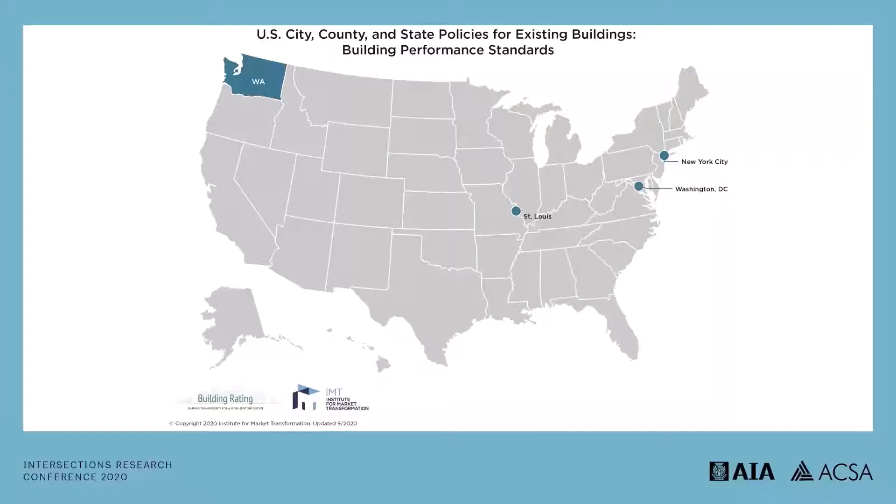We're actively working with a dozen additional cities and states building on this framework.

The standards could include considerations for multiple measures, including energy, like site energy use intensity, carbon, water use, health measures like indoor air quality. They can be designed to prioritize upgrades supporting climate resilience or to prioritize investments in building sectors where improvements will most benefit society. City governments are looking at these flexible standards as a way to advance social priorities as well, looking at ways to advance affordability. A few of my IMT colleagues recently published a paper on how to improve buildings under a building performance standard while maintaining affordability in housing.

Another trend in policy is toward involving the people most affected by a challenge in the policy design process. In the context of building performance standards, this includes people who experience unhealthy buildings or live in polluted neighborhoods, renters, and also members of the industry who can affect how buildings are designed and constructed.

So given these trends in policy, the key questions I want to pose to this community for research and practice address how we ensure that buildings perform to the level we need them to. What is or should be the architect's role in ensuring high levels of ongoing building performance? What are the most important measures of building performance? Many measures have been offered in leadership frameworks like LEED, WELL, Fitwel, and Passive House.

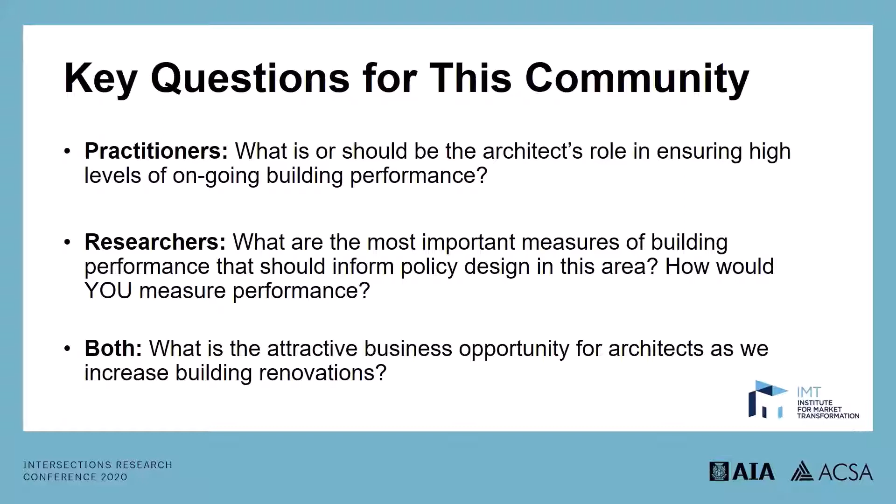What measures do you think matter most and should be applied to the policies under design today? And finally, what are the business opportunities for architects as we increase building renovations across the country? It's great to be here with you today, and I look forward to our conversation.

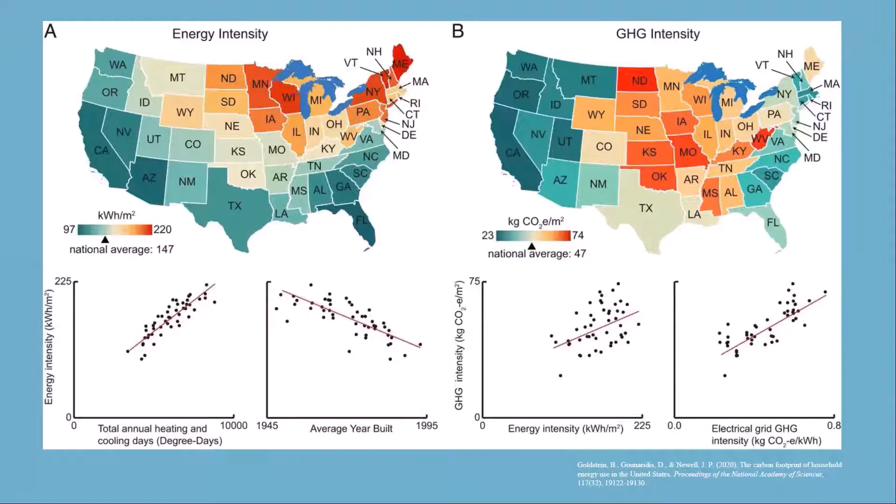...the legacy economies or legacy component of the built environment in settlement patterns in the Midwest and the Northeast, which would be anticipated by some measure to have parity with economic output. But then what we see in terms of GHG intensity is that it's actually not necessarily about economic output—these are slightly different measures between Scope 1 and 2, and Scope 3 emissions. Nonetheless, what we see here is a difference in lifestyle and settlement patterns that are largely attributable to land use, as I would argue at the end of the day.

Los Angeles actually has a lower carbon footprint than Boston, which I think would surprise many people who think about car use and suburbanization. But what we really see is that it's the suburban and housing land uses that actually change the mean. It's the wealthy suburban areas that further skew the underlying efficiencies of our carbon footprint. This is something we have to keep in mind.

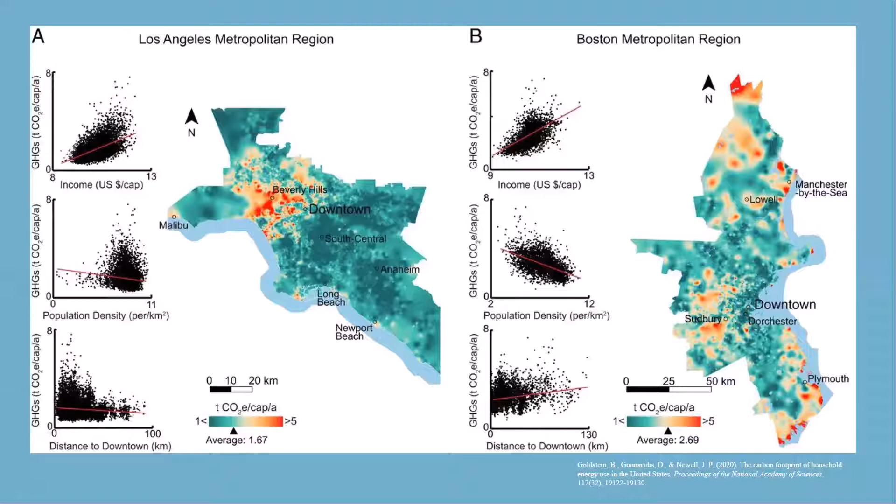So the proposition I'll make today is that land use is the most economically efficient way to address climate change. The upside is that it's truly scalable, and we have all these other co-benefits of ecosystem services. The downside is that there's a scarcity of land, or an outcome associated with our interventions in the name of climate mitigation that undermines affordability of housing in particular.

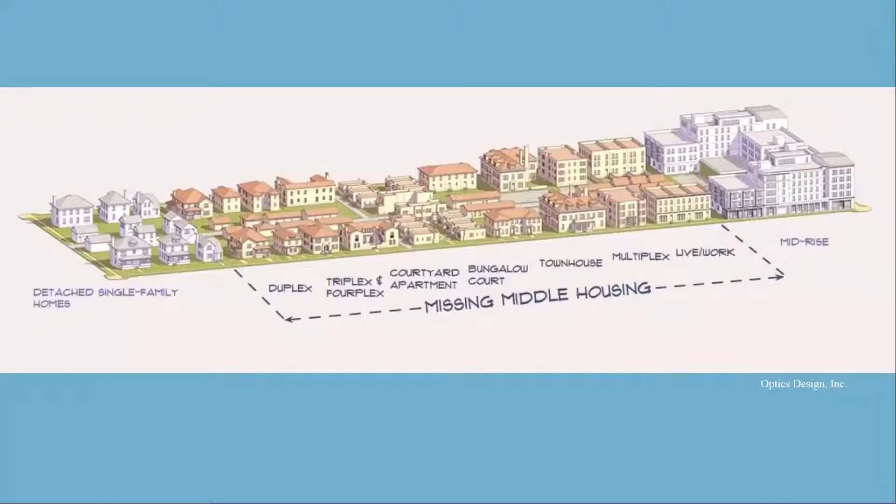We can think of infill development as an opportunity in architectural practice for a greater diversity of typology—in this case, the missing middle of housing, which I think is a critical component of environmental design. It has a variety of other co-benefits in terms of accessibility of transportation, healthcare, and other things that accommodate these greater densities.

And of course, TOD is the ultimate holy grail of urban land use. Here we see North American cities, as measured in gigajoules per capita per year, really standing out by virtue of our car economy, for lack of a better term.

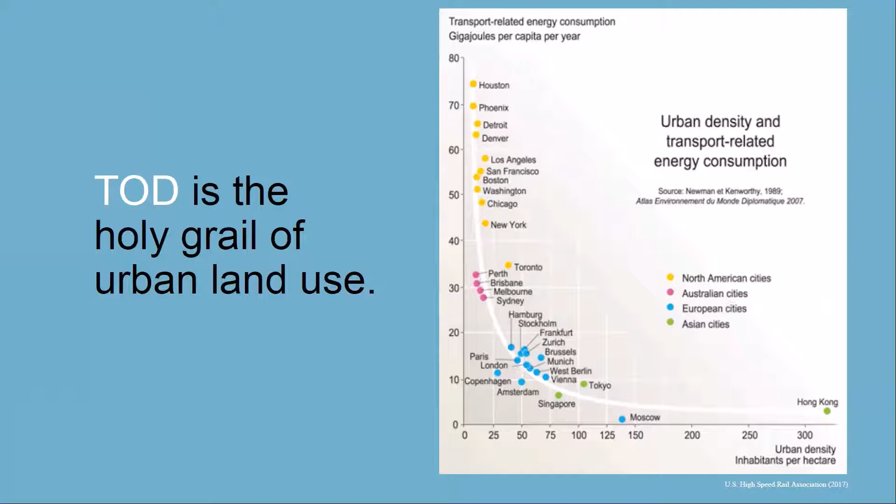So where does this all boil down to? It boils down to an opportunity for merging land use through zoning regulation with building regulation. There's a carrot there: we set up EUI, energy intensity benchmarking, and use that benchmarking perhaps for bulk bonuses that reward increasing marginal utilities in the energy or underlying carbon footprint associated with buildings—means to stimulate or incentivize investment in sustainability.

But I think at the end of the day, it's really about sticks. It's about disclosure and reporting of greenhouse gas or carbon equivalency in buildings, as we see for instance in Local Law 97. But fundamentally, at the end of the day, it's about a price on carbon—there's no two ways around it. That price on carbon has to be incorporated in life cycle analysis from an architectural design point of view, and it has to be incorporated within greater and broader measures of land use.

This is the only way we can fundamentally address climate change and climate mitigation in the built environment. It's a combination of a price on carbon, environmental technology, and fundamentally, land use. These are the three pillars from which we have an opportunity to address the climate crisis that we live within.

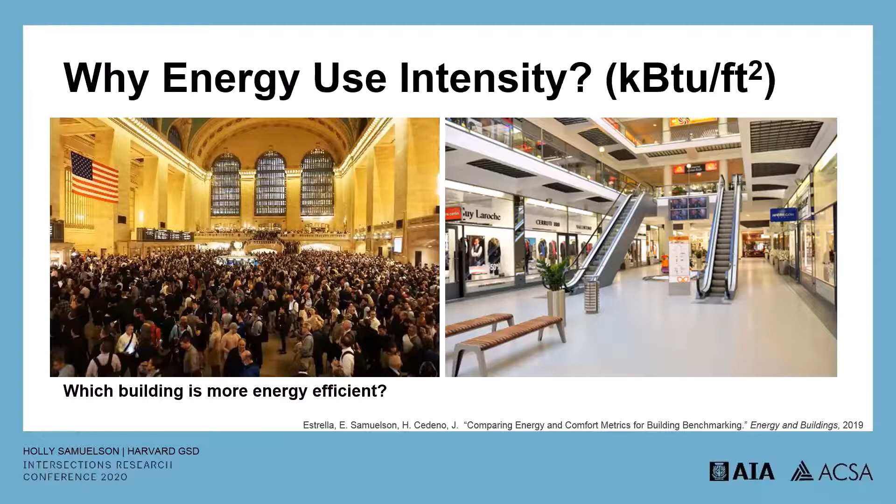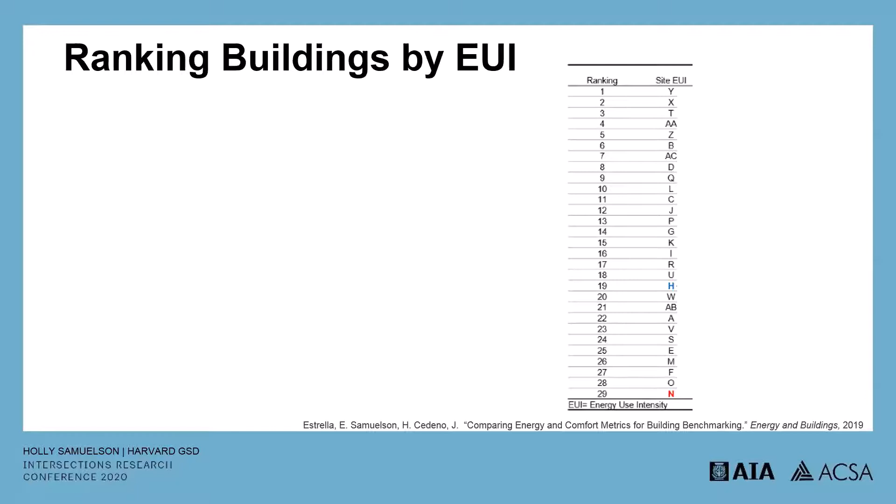So my team was wondering what would be a better metric to use. In this project, we were ranking buildings by energy use intensity, and these were residence halls. You can see the rankings on the right. Then we also ranked them by EUI per person and per person day, and the rankings totally changed.

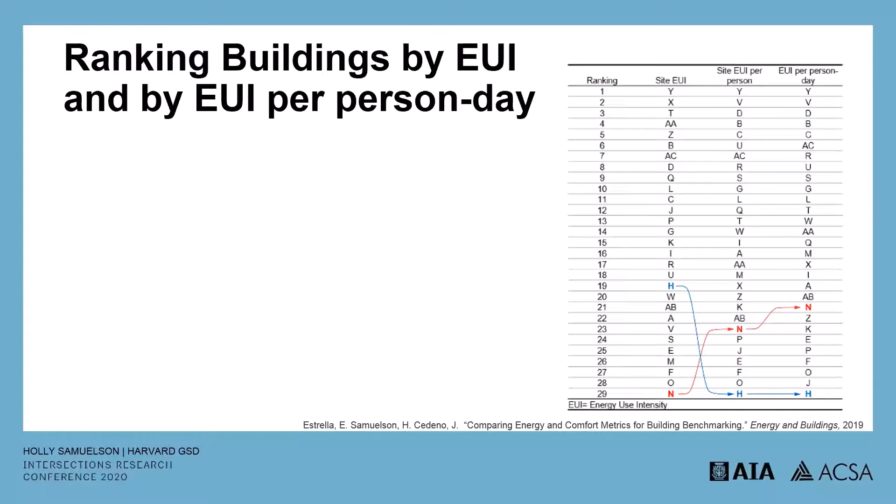So if you were a building owner, at first you might think that building N was your worst performing building, but then it turns out that it was a completely different building. So what would be a better metric of ineffective energy use?

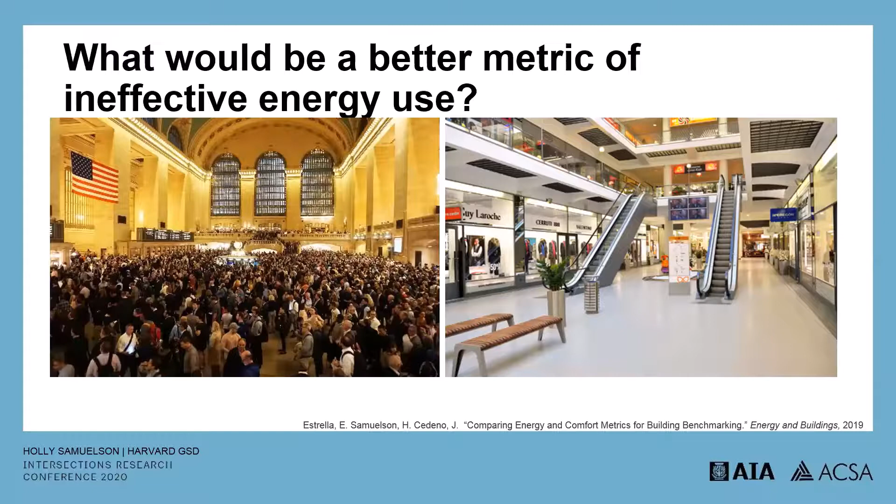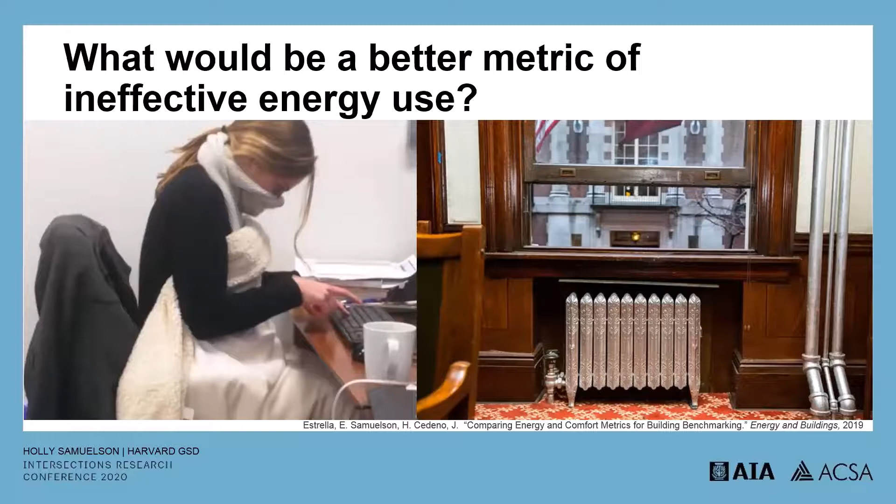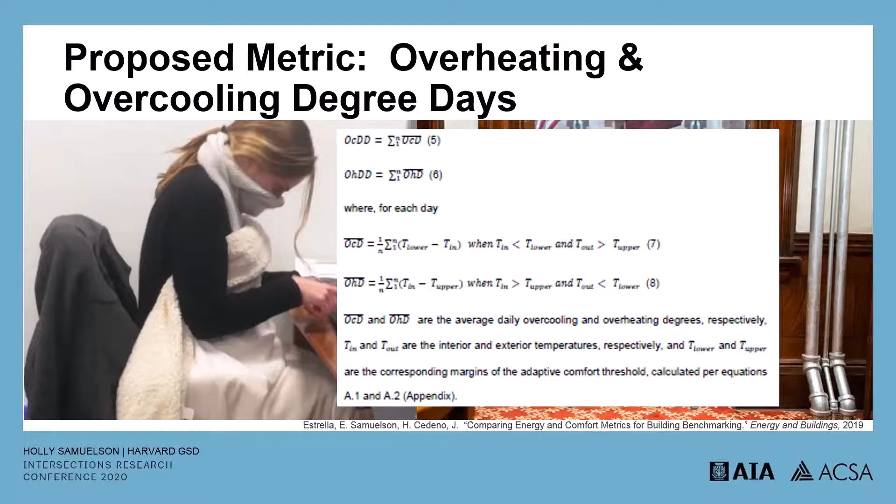Well, I don't have all the answers, but we thought of one idea. It's based on this situation that I really hate, which is when it's summertime and hot outside, but you're freezing in your office, or the opposite in winter, where the only way you can achieve comfort is by opening your window. So we suggested, why don't we use overheating and overcooling degree days, which simply uses indoor and outdoor temperature, two things that are easily measured, to calculate the duration and severity of energy used to overshoot comfort conditions.

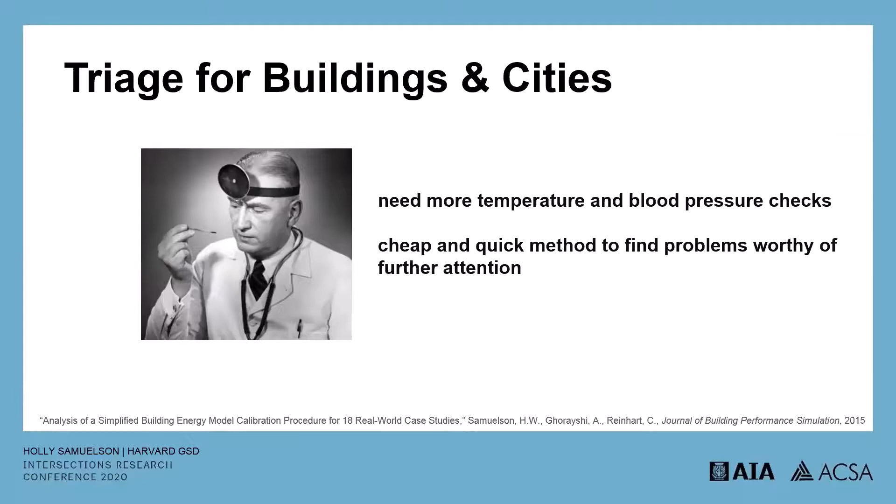I'm also a fan of the saying, don't let the perfect be the enemy of the good. And I think that we need more triage for buildings and cities. We need more temperature and blood pressure checks, those cheap and quick methods to find problems worthy of further attention. In my work, I've been trying to develop these tests.

Here's a project that we worked on. In my group, we've been building on the work of Joe Allen and others at the Harvard School of Public Health to focus on the co-benefits of energy savings in buildings. So when considering building upgrades, especially at the policy level, instead of focusing entirely on utility cost savings, we should also quantify the social cost of carbon and the health benefits from reduced pollution emissions.

We tested this for building energy efficiency upgrades in 10 US cities. According to our estimates, the climate and health benefits may account for an additional 42 to 44% of the direct utility savings on average.

We also, in this paper, tried to quantify the health impacts of reduced indoor temperatures in heat waves, especially for the most vulnerable populations who may not have air conditioning. Although we were not able to yet quantify those health-related cost savings, we do think that this is an important aspect to consider in the future, especially as heat waves become more intense and more frequent.

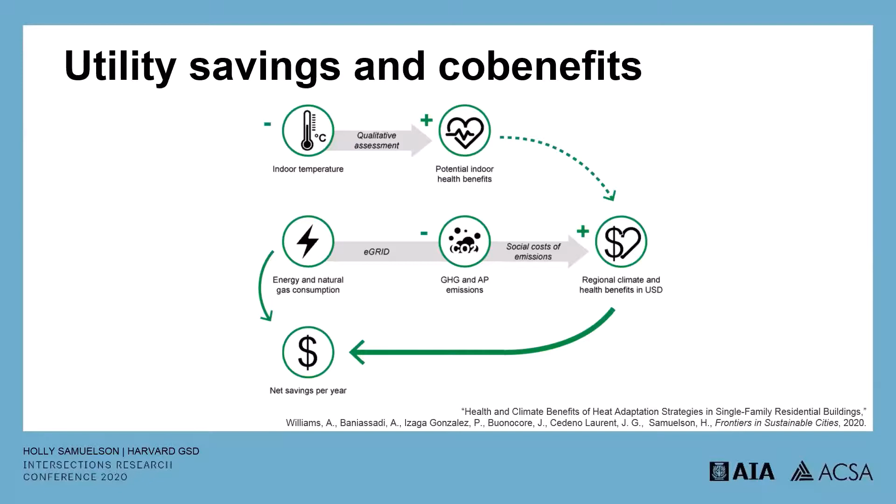While we're on the topic of co-benefits, in this paper we were also thinking that benefits of building improvements should also include reduced urban heat island effect, due to the fact that in a better building, my air conditioning isn't dumping as much heat into the city, and therefore it's not contributing as much to the urban heat island effect. So we're working on a paper now demonstrating how we might calculate this.

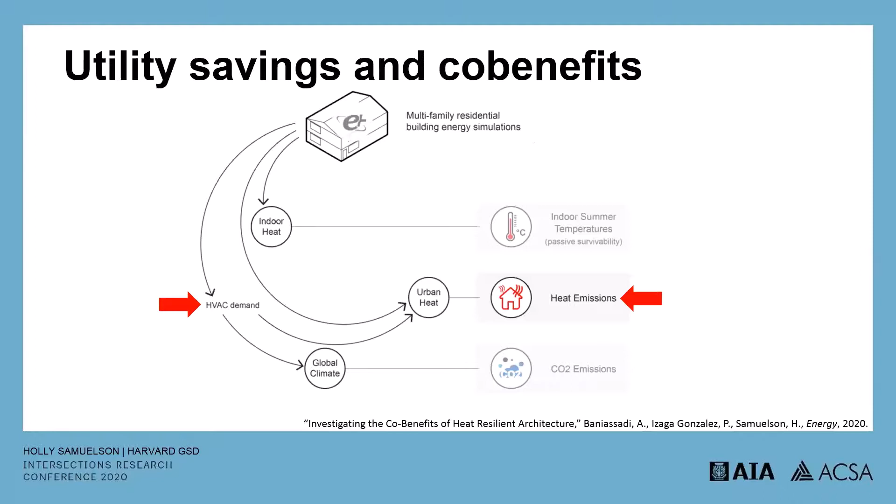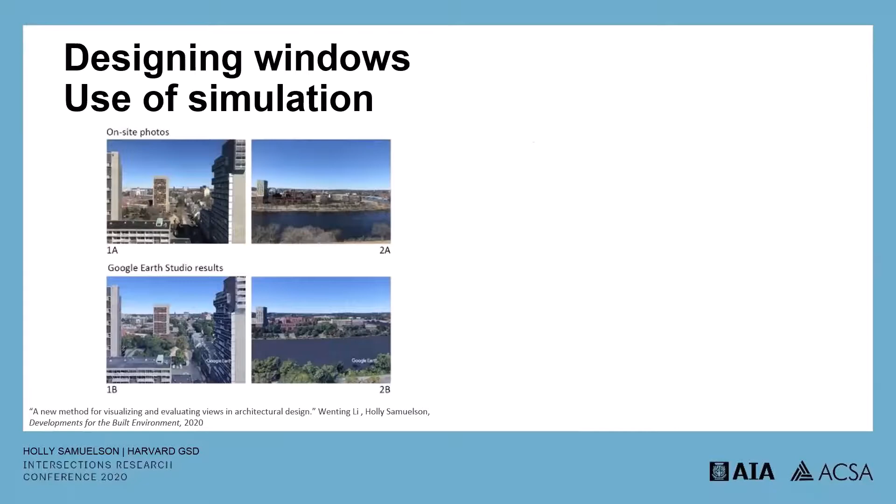In this project, we wanted to improve the way we design windows by first finding a method to produce photorealistic views from virtually any fictional window, and then taking into account the building geometry, including energy performance features such as overhangs and fins, which I know are sometimes great performance features, but architects can be nervous that they might block an important view.

So this would help designers find that out. Next step would be helping the user define a view score so that view quality could be automatically quantified, which is important because it allows view to become part of a parametric simulation process, along with other important performance factors that affect carbon, like greenhouse gas emissions, energy costs, and daylight performance.

In this way, designers can know the important trends before even putting pen to paper, like rotating your building within 15 degrees of due south might not have much impact for daylighting and carbon, but for view, perhaps anything beyond 7 degrees would help significantly. So these are the kind of trends that I think it would be important for users to understand before starting to design.

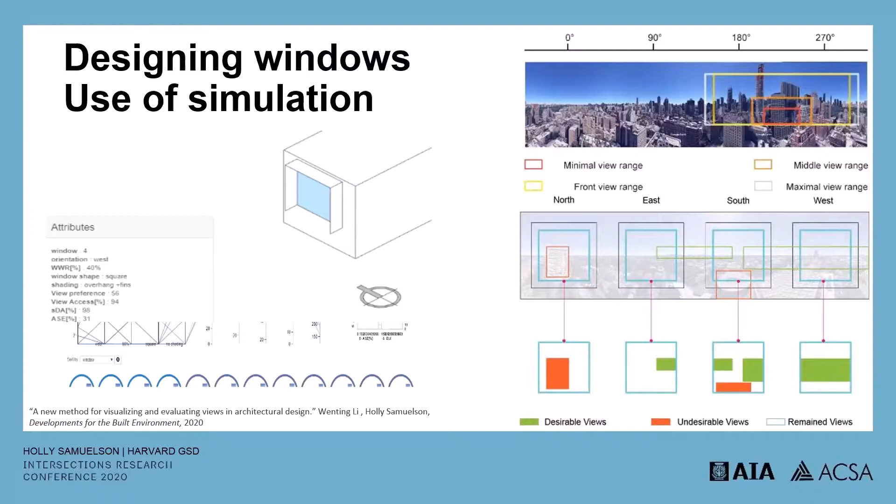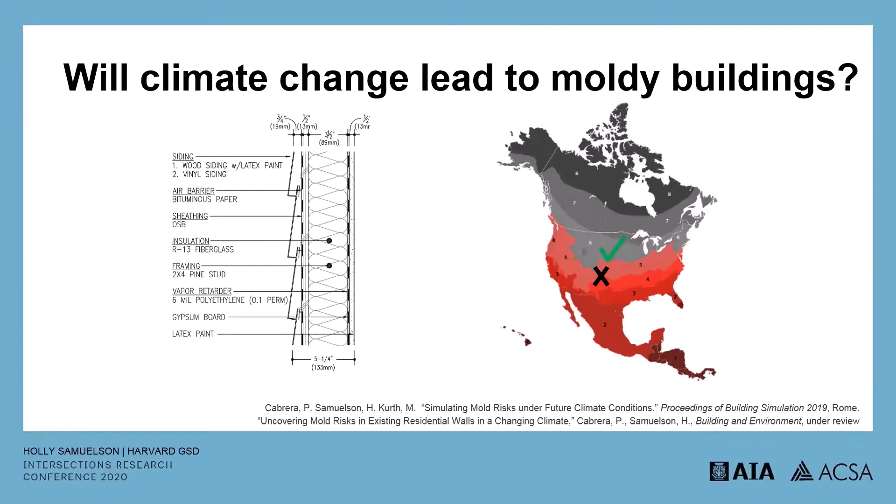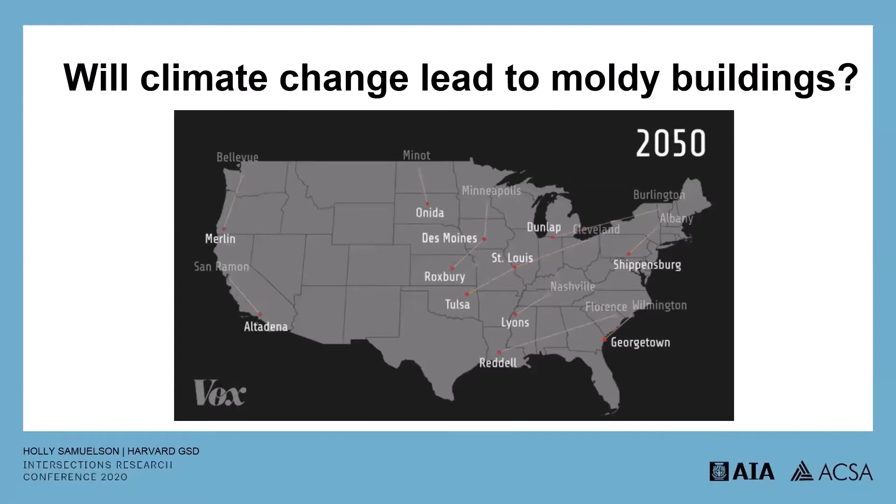I want to talk about one last project because the findings so far are so alarming. What will happen to our existing building stock in future climates? We would never build a New York-style wall in North Carolina. But what will happen when, in the future, New York becomes more North Carolina-like? This is to say nothing of climate shocks such as leaks due to intense storm events, flooding, or storm surges, which we also expect to happen with climate change, but we're ignoring those effects right now.

So our existing walls often include a vapor retarder. In cold climates, these were meant to prevent warm, moist air in winter from migrating into the wall cavity and condensing on cold surfaces. What happens inside these walls on hot, air-conditioned summer days today? The opposite happens. The warm, moist air migrates from the outside, is exposed to cold surfaces, and is trapped without any means to dry to the inside.

We hypothesized, and indeed our simulations showed, that this is occurring today. But the temperatures are mild enough and the season short enough that any microscopic mold growth would typically die off by the next season.

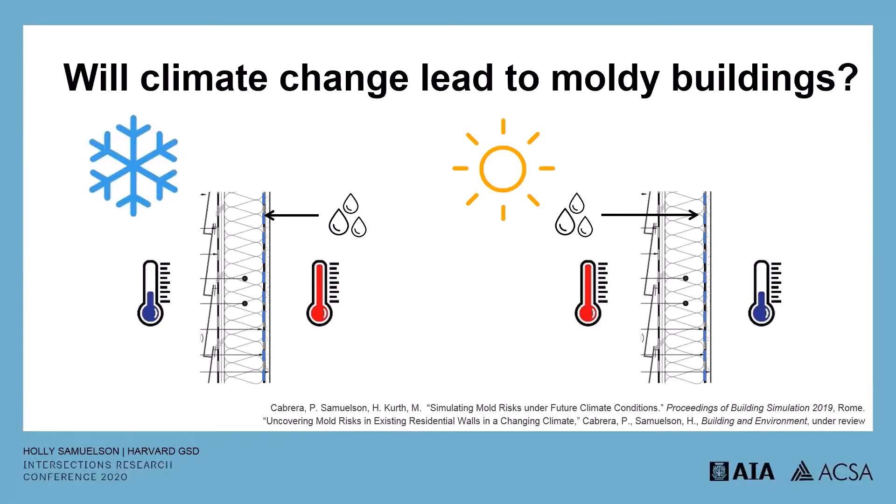We wanted to test future conditions, so in our papers we've done 4 steps. First, we've identified typical wall sections in different cities and climates based on different historic building codes and census information on the building stock. We've morphed weather files to future climates using best practices, and we've used best practices for hygrothermal simulation, which simulates moisture and heat flow through the building envelope. Then we've used mathematical mold growth models from other researchers who have done extensive laboratory tests, and we put that all together to get a mold growth index for different walls in future climates.

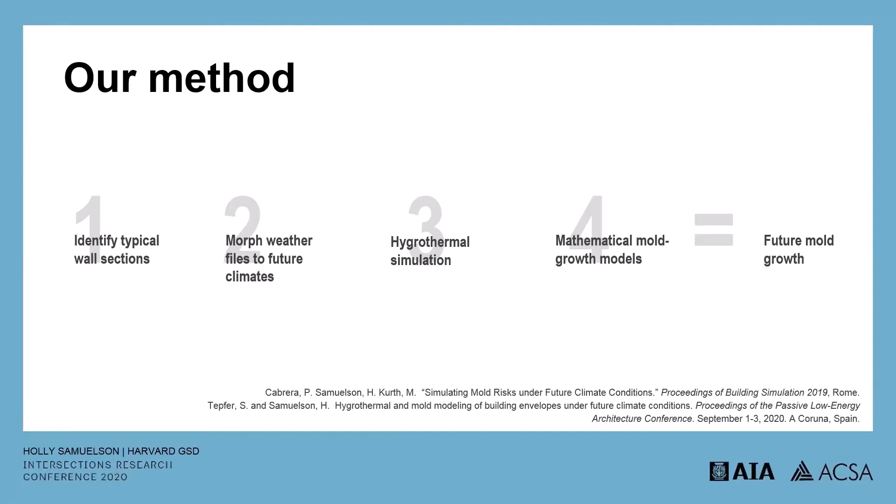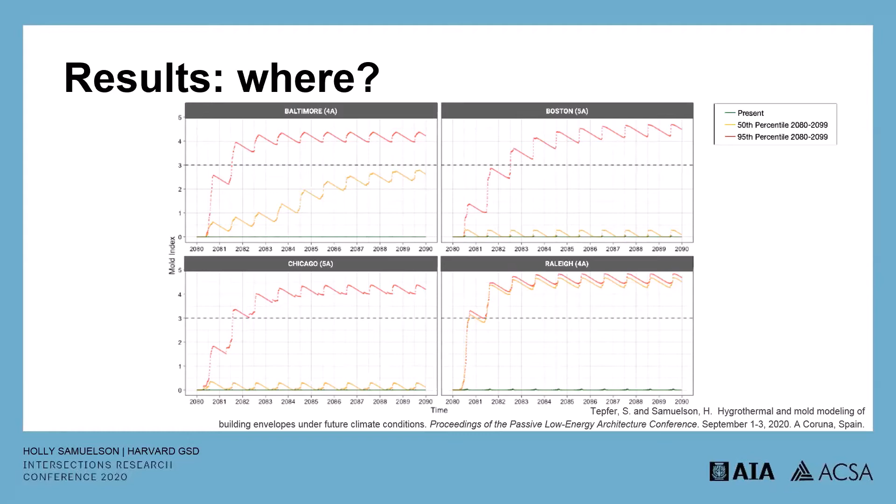So we tested and found widespread potential problems in ASHRAE climate zones 4A and 5A. In the east, this is cities like New York City, DC, Philadelphia, Baltimore, Boston, Chicago, and Raleigh. So when will this happen? Well, there's a lot of uncertainty in our method, but in some cities this could be coming as early as mid-century, as shown here.

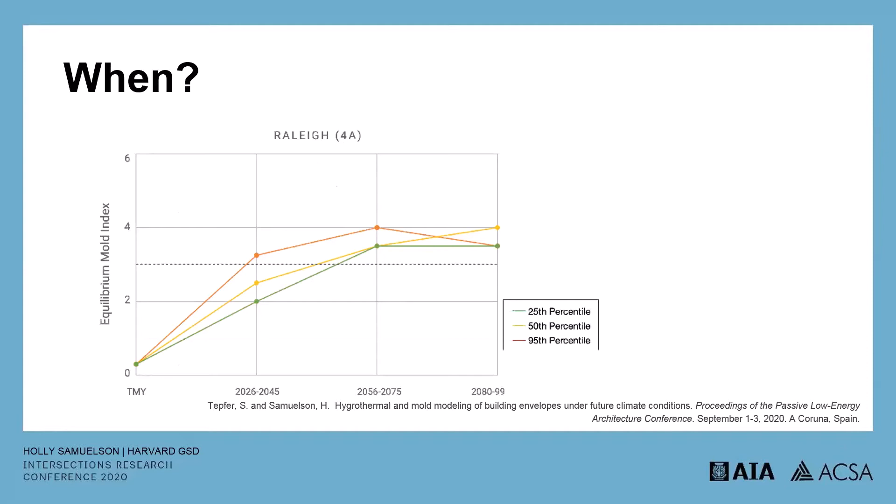So what should we do about this? Well, for one thing, fund more research. This is just the tip of the iceberg, and we had not found any conversation about potential future mold growth due to just the temperature and humidity changes expected in future climates. We think this is an important topic that needs to be part of the climate resilience conversation. We also think we need to update our building codes to be amenable to future climates and not maladaptive.

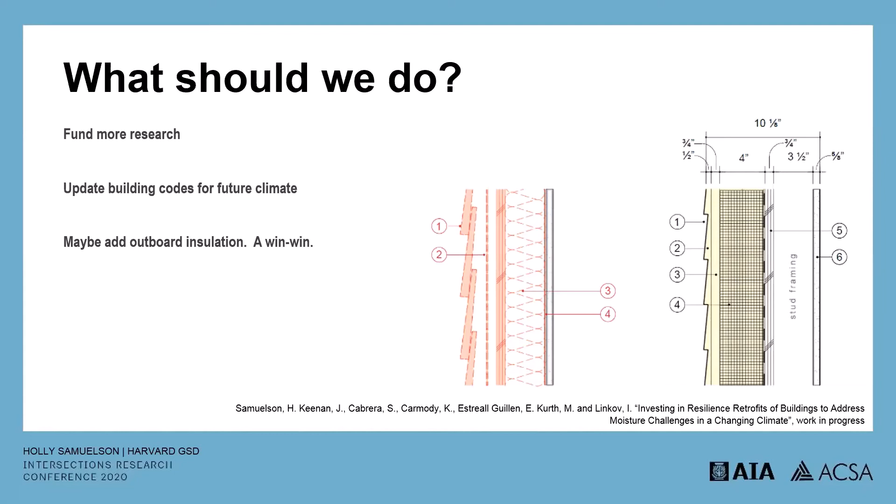What specifically should we do to this existing building stock? Well, we're still working on that, but one solution might be to add more outboard insulation outside of the stud cavity, which, by the way, would be a win-win situation because that would improve the thermal performance of the building and lead to less carbon emissions in operations.